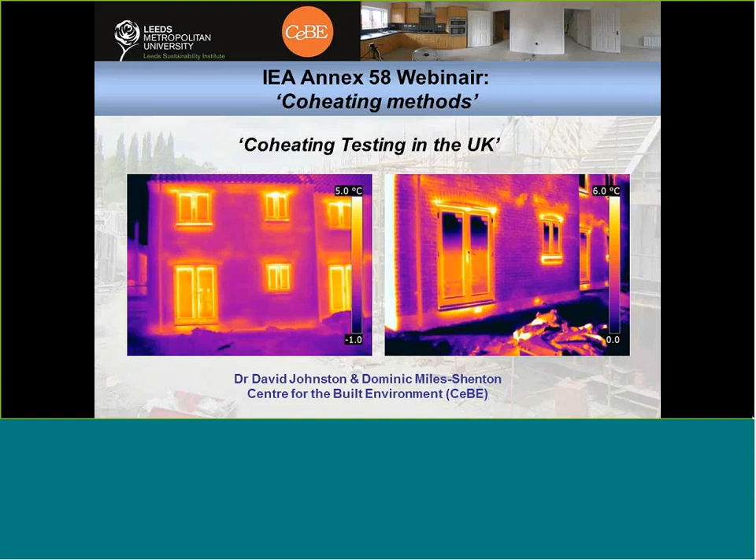Myself, I'm going to talk briefly about new dwellings and the co-heating testing that we've been involved with in new builds in the UK, and Dominic is going to follow me later on discussing existing properties and the ways in which we've used co-heating testing to look at interventions as well.

Just to give an overview of Leeds Met's experience of co-heating testing: we've undertaken in excess of 50 co-heating tests since our inception as a group in the UK. The very first one was undertaken almost 25 years ago in the 1990s as part of the York Energy Demonstration project, but the majority of the 50 or so tests have been undertaken within the last decade or so.

We've undertaken tests on a very wide range of dwellings, though only on dwellings. Most of our work concentrates on new builds—the majority of the tests have been on new build—although that's increasingly changing, and we're undertaking more tests now on existing dwellings as well.

We're testing a range of dwelling forms, from some of the most complex ones to test—apartments—through to detached dwellings, terraces, bungalows, semi-detached and detached, using very different construction techniques: masonry cavity, a traditional UK new-build method; solid brick wall construction for existing properties; through to more modern methods of construction. We've tested a hempcrete dwelling, for instance, and dwellings constructed using structurally insulated panel systems as well.

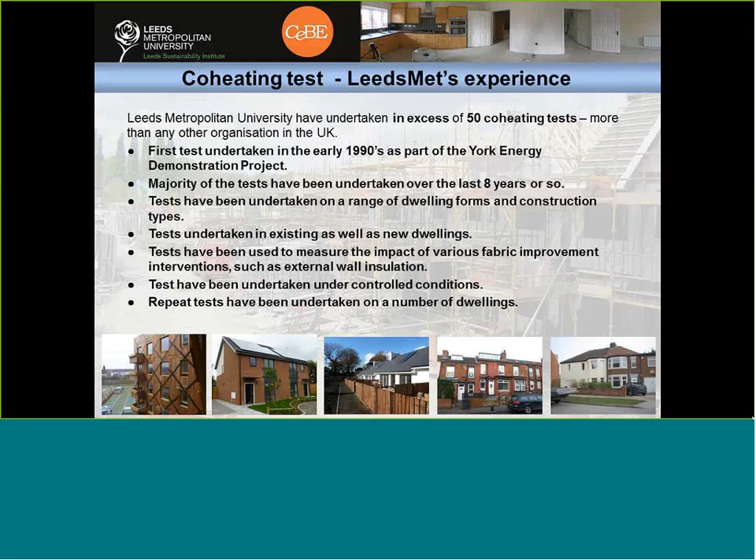We've also been fortunate enough to undertake tests under controlled conditions, which I'll talk about briefly later on, and we've undertaken repeat tests on a number of dwellings as well—one of the few institutions able to do that. So quite a broad range of tests that we've actually undertaken.

One important thing to know is that not all the tests have been successful. We've had difficulties with some tests—it's not always possible to undertake a successful co-heating test, no matter how hard you try. Because it's an in-field measurement, you are at the hands of the weather, and in some cases we've not been able to achieve successful results.

One example is a block of apartments in Middlesbrough, where we undertook the test in March 2012. During that period in the UK, weather conditions are normally sufficient to give a high, or reasonable, chance of a successful test. But unfortunately, when we undertook the test on this particular apartment, there were very high levels of solar insolation, and because it was a very small apartment with a large amount of glazing, that had a big impact on the test itself.

We extended the test period. One thing about co-heating testing in the field is it's not really a fit-and-forget test—certainly using the protocol we've developed at Leeds Met, you can't just undertake a test and leave it. We did carry out a number of interventions with this particular test, but out of 76 days of testing, we only got 11 days' worth of usable data, partly because of problems.

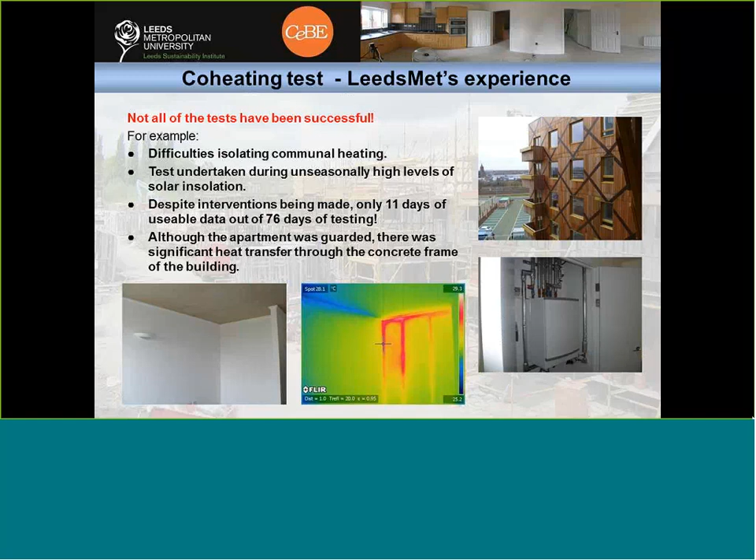In terms of the co-heating tests we've developed, we've used our expertise gained over the last 25 years or so to develop a co-heating testing protocol. The first iteration was published in 2010 by one of our ex-colleagues, Jez Wingfield, and that was adopted as part of the UK Government's Technology Strategy Board's Building Performance Evaluation Programme. We've since revised this and presented it to the IEA Annex 58 as part of building characterisation work. It contains considerable information on undertaking co-heating tests, ranging from the test procedure itself, the equipment required, where you may want to locate the equipment, the types of equipment required, and various issues to consider depending upon the type of building, thermal mass characteristics, and data analysis techniques. There's a web link in relation to the latest version of that co-heating testing protocol.

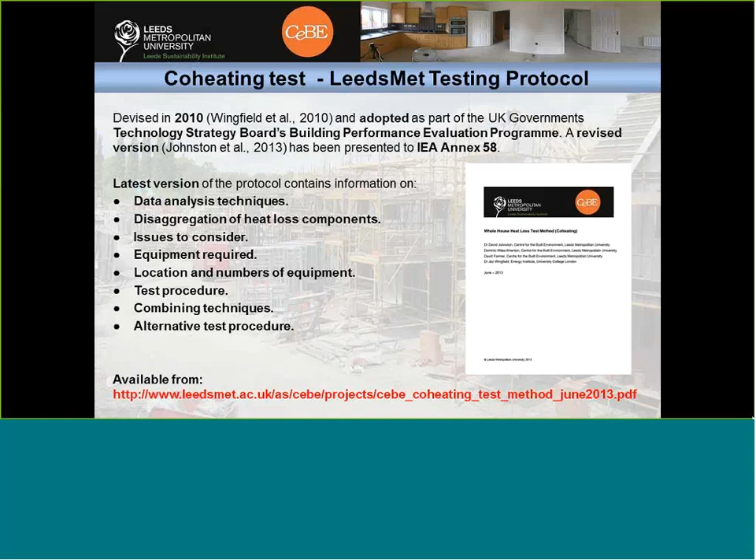In terms of recent results we've got in relation to co-heating testing, we've been involved with the UK Government's Technology Strategy Board Building Performance Evaluation Programme, and we were fortunate enough to test 7 new build dwellings as part of that programme, a range of different dwelling forms and different types of construction. The graph in front of you shows the results obtained from these tests.

You can see in blue the measured heat loss coefficient, in red the predicted heat loss coefficient, and in green the actual difference between the two. In all of the cases, as you would expect with dwellings in the field, the measured heat loss coefficient was greater than the predicted heat loss coefficient. I think I've got the colours wrong on that graph actually - greater than the predicted heat loss coefficient.

One thing to note is that in terms of predicted heat loss coefficient at Leeds Metropolitan University, it's important that when we compare measured against predicted, we don't compare the design intent heat loss coefficient against that which is actually measured, because quite often the design varies quite considerably. So our predicted heat loss coefficient is our best informed guess, taking into consideration what we've observed when the dwelling's actually built, of what the heat loss coefficient actually is.

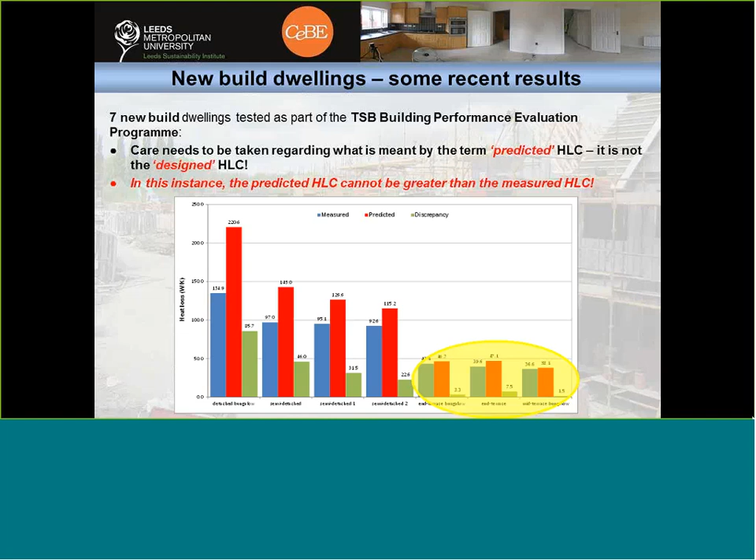If we look at the dwellings in our database of 26 new build dwellings, you can see there's quite a range of performance in terms of measured performance against predicted performance. In terms of the yellow ovals, that's the 7 dwellings included as part of the Technology Strategy Board's Building Performance Evaluation Programme. The sample, unfortunately, is not a random sample, because these dwellings have been presented to us as part of various different research projects, but this is the most comprehensive database available of dwellings measured through co-heating tests.

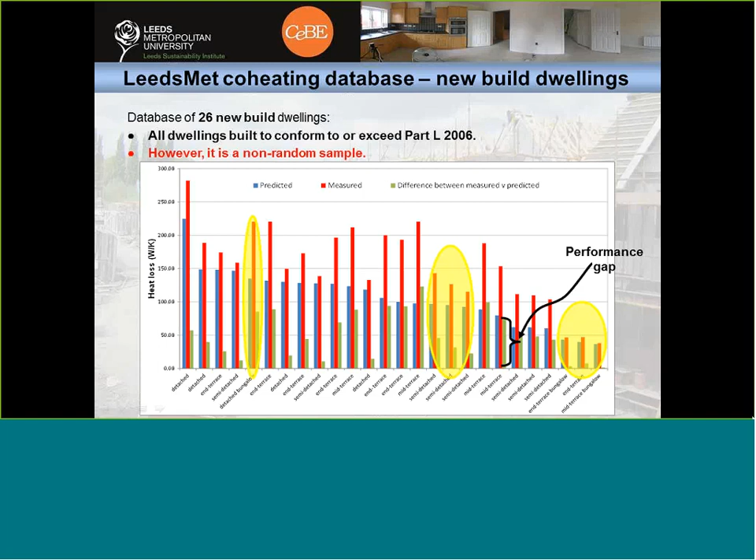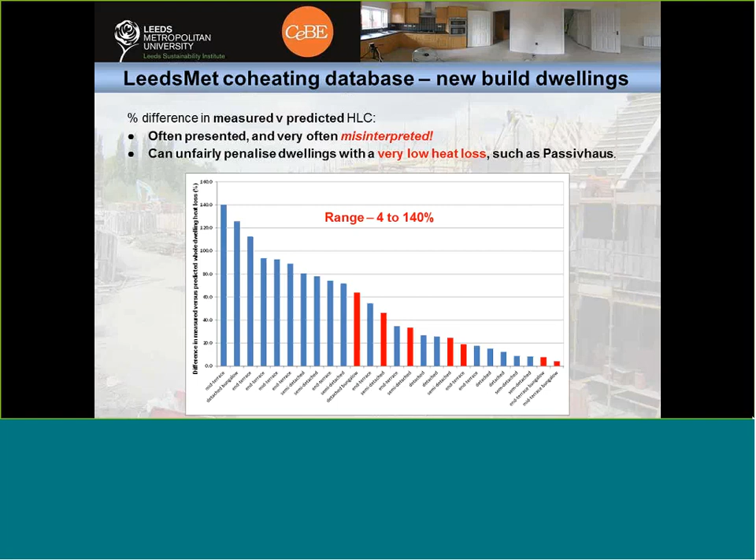If we look at the percentage difference between measured and predicted heat loss coefficient, this is a graph that's quite often presented, but unfortunately very often misinterpreted. You can see there's a very wide range, from about 4% discrepancy between measured versus predicted performance up to 140%. But one of the things this graph doesn't show is that it can unfairly penalise dwellings which have a very low heat loss coefficient, such as Passivhaus dwellings. Passivhaus dwellings can be very well insulated with very low heat loss coefficients, so small differences in heat loss coefficient can present themselves as quite a large percentage difference between measured and predicted performance.

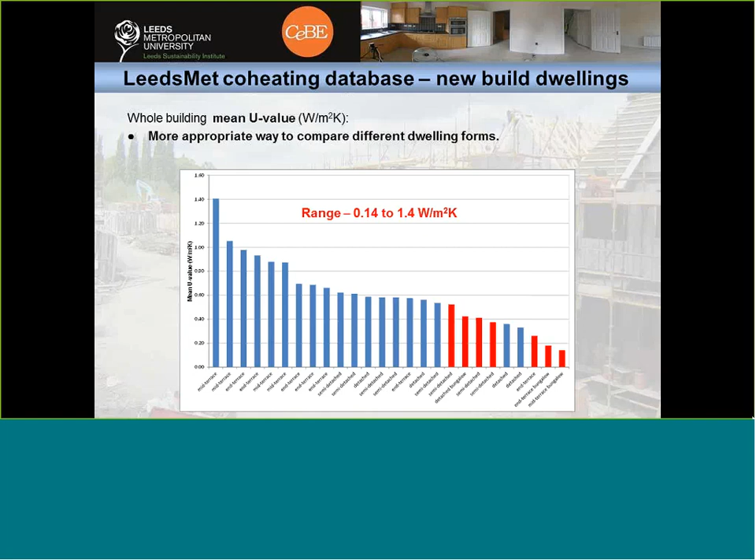A more appropriate way of presenting the information is to look at whole building mean U values - that's certainly more appropriate. Contractors have a much better understanding of an actual U value. There's again a very wide range in terms of U values, but the columns in red are those dwellings we tested as part of the Technology Strategy Board Building Performance Evaluation Programme, and they all perform towards the better end of the range of performance.

In terms of coheating testing, there's been some press in the UK recently regarding reliability and repeatability of the coheating test. We've been fortunate enough to undertake coheating tests within controlled conditions at the Salford Energy House at the University of Salford. That's a 1920s terraced dwelling, solid masonry, built within an environmental test chamber. For undertaking such tests, it's possible to remove conditions which can affect a coheating test and determine whether a test will be successful. For instance, weather conditions can be controlled and there's no solar insolation.

In terms of the work we've done within this controlled test environment, we've undertaken two separate tests at the Salford Energy House. One on what we term a virgin dwelling, the actual Salford Energy House as constructed within the test chamber without any intervention measures. We undertook that test under three different delta Ts, with a mean internal temperature of 25 degrees centigrade, with different external temperature conditions controlled by the environmental chamber, and the heat loss coefficient was very similar under each of the three conditions.

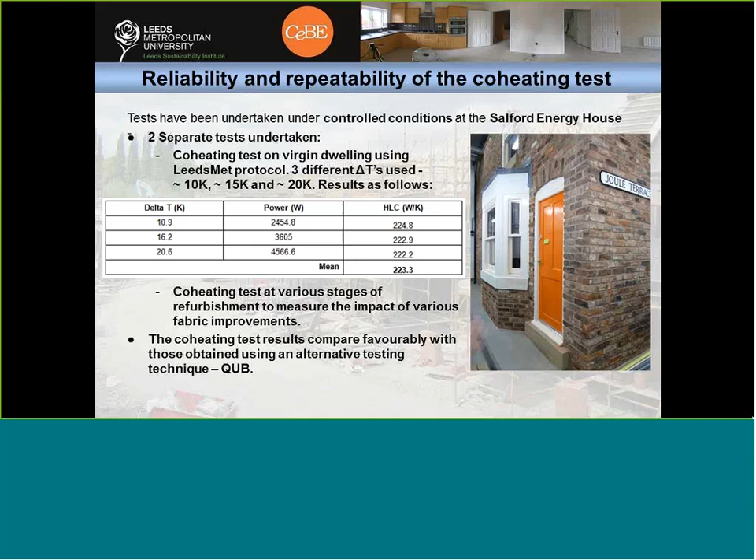Also, in terms of reliability and repeatability of coheating tests, we've undertaken some repeat tests on one particular dwelling almost 3 years apart, and they've shown in terms of repeatability that there's virtually no difference in heat loss coefficient. By undertaking an independent t-test on that, there's no significant difference between the heat loss coefficients either. So that gives us a great deal of confidence in the test protocol and the test itself, that it can be repeatable.

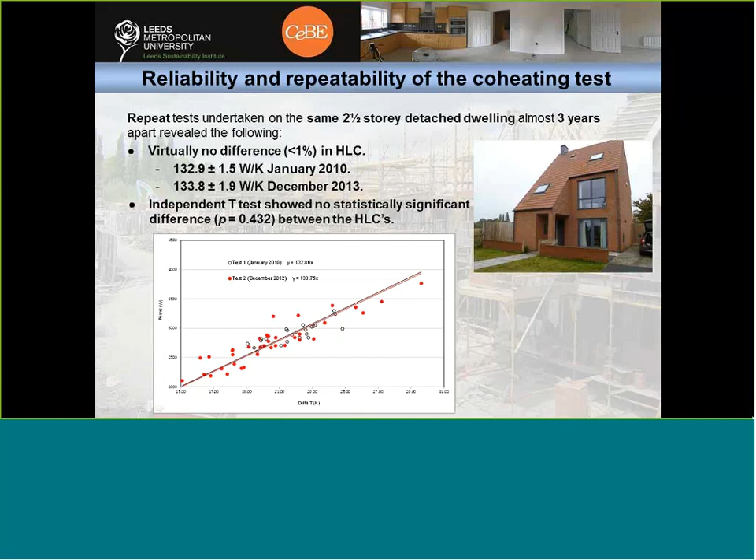One of my colleagues has also been involved in developing alternative test methods. The existing test protocol can be quite labour intensive to undertake and involves a number of items of equipment which have to be installed within the dwelling itself. One of my colleagues has developed what we're calling a simplified test method, where minimal equipment is required, just some temperature and humidity sensors, and instead of using electrical resistance heaters to input heat into the building, it uses the actual building's own heating system.

This is only at developmental stages at the moment, but we've undertaken some preliminary tests in the field on two separate dwellings of two different dwelling forms, one detached, one semi-detached, and they are of two different construction types, one masonry and one structurally insulated panel system, timber frame system. The preliminary results and analysis are encouraging.

Further work on this is planned later this month, where we intend to retest one of these dwellings, and we'll report on those results when they become available. We're hoping that the simplified method will mean there's essentially going to be a more commercially viable test out there, which will hopefully be much less expensive, much less labour intensive, and able to be undertaken within a shorter period of time.

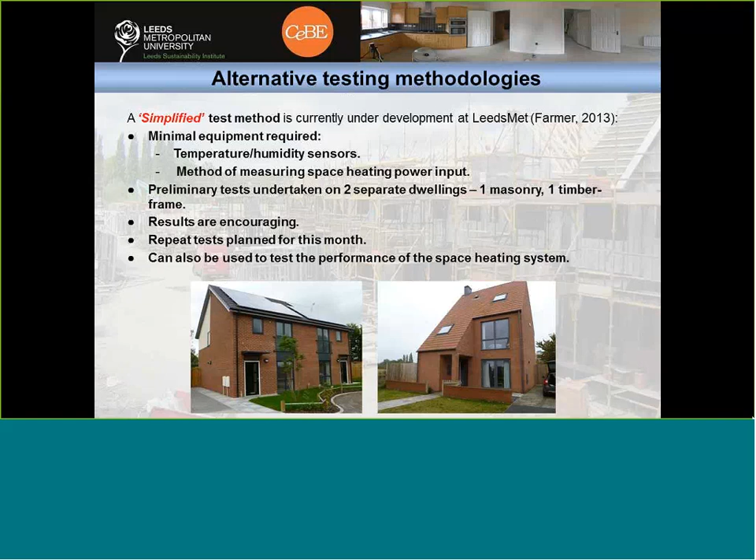I'd just like now to pass over to my colleague Dominic Miles-Shenton, who's going to go through some of the testing work we've undertaken on existing properties.

Hello everyone. I don't know whether it's the economic climate at the moment, but there seems to be less and less people wanting to measure just standard new build dwellings in the UK.

Most of the recent tests that David's been looking at have been of low energy dwellings. Most of the work now that's coming in seems to be looking, rather than just getting a general heat loss coefficient for the dwelling, at before and after work on renovations, just to see how successful they are and whether they're giving the energetic and financial paybacks that are expected from them.

So this, what you can see on the screen now, is a house that we're currently testing, or just dismantling the test. It's a quick video walking through to show you what we do on the coheating test. This is a back-to-back terrace house. It's got separating walls on 3 sides. We tested it in February last year in its original state, and now we're testing it again with internal wall insulation put on the front of the house, and the ground floor and roof insulated as upgrades. You can see the weather station on the front.

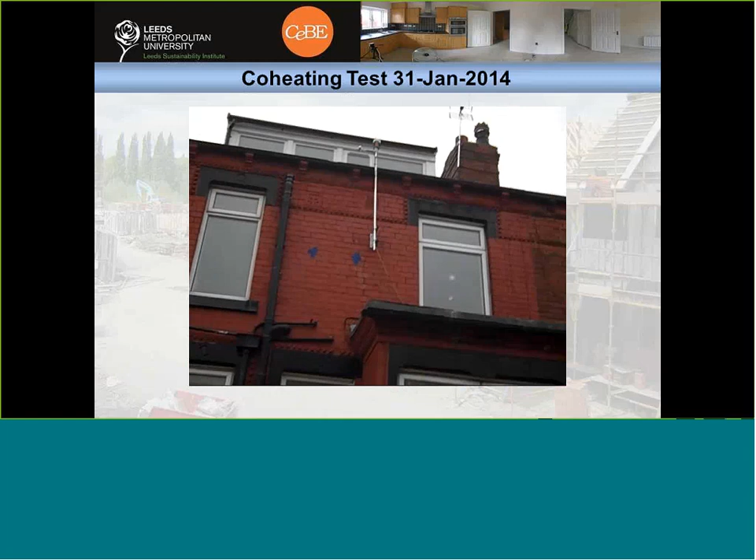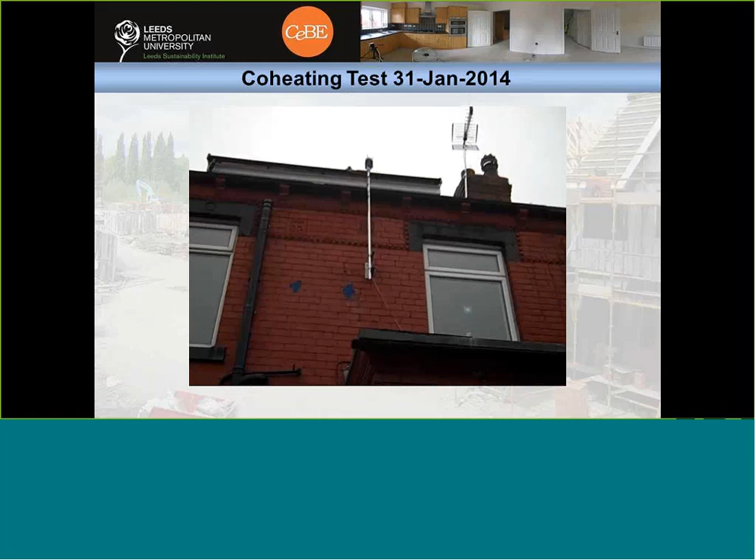Inside the house, because we've got 3 separating walls, we have to know how much heat is actually going into each of the neighbouring properties. So we have heat flux sensors on the adjoining elements, as well as on the external walls with the internal wall insulation fitted. There's one on the bay roof.

You can see that it's only a small house, so it's actually quite difficult to put all the stuff in there without it interfering with the measurements we're taking. But a quick one - heat flux sensors are recorded on data loggers.

We tend to put this setup once on each floor. Everything is plugged into the wall, it goes through a kilowatt-hour meter, so we know exactly how much energy is being put in there. There's a temperature controller, RTD temperature control, so we've got fairly good control. You can see the temperature set to 23 degrees, it was 22.8 in there. We tend to get very little variation from the actual temperature. The circulation fans keep the temperature stable throughout that room on that floor.

We have the same setup on every single floor, with heat flux sensors strategically placed. We use a thermal camera to identify the areas where we're going to stick those heat flux sensors - we don't just put them down there at random.

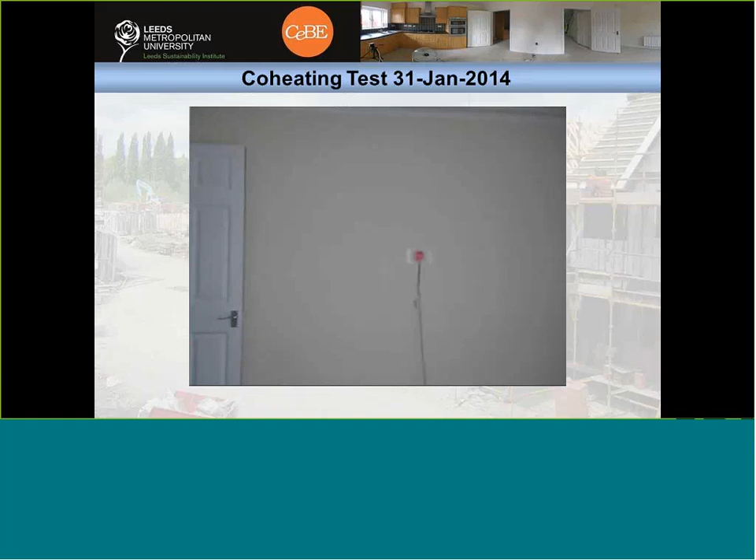This house had a cellar. A big problem with the cellar was - you'll see when the light goes on - the heat loss going into the cellar, which is also the main infiltration zone. So if you heat the cellar up too high, because the infiltrating air is coming from the cellar into the whole house, that will start to drastically raise the moisture levels within the house itself. So we put the same equipment in the cellar, so we've got an idea of how much heat is being lost from these cellars, from these basements. But we couldn't just keep that at the same temperature as the house because of this moisture issue.

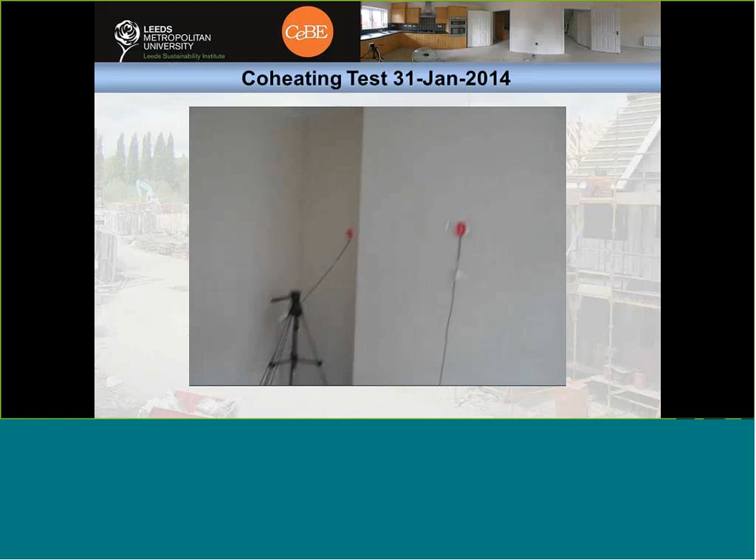So again, heat flux sensors on all the elements there, so we know where the heat's going from the cellar. Temperature sensors directly underneath where the heat flux sensors are in the kitchen above, so we know how the improvements in the ground floor are performing.

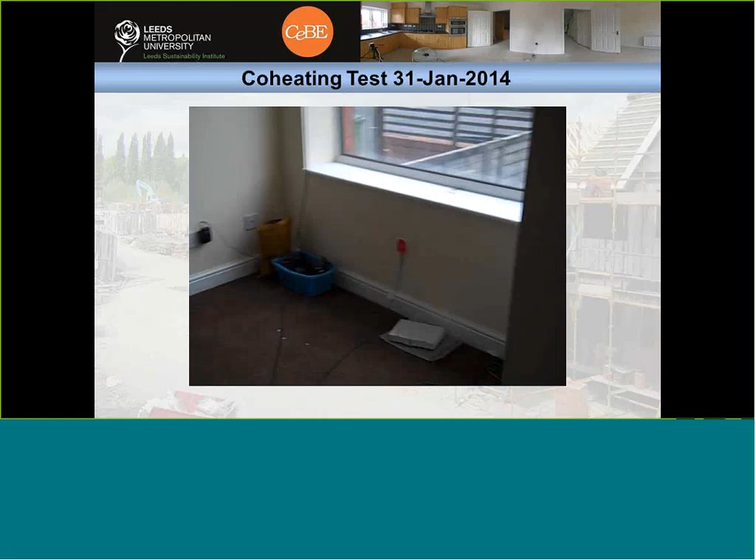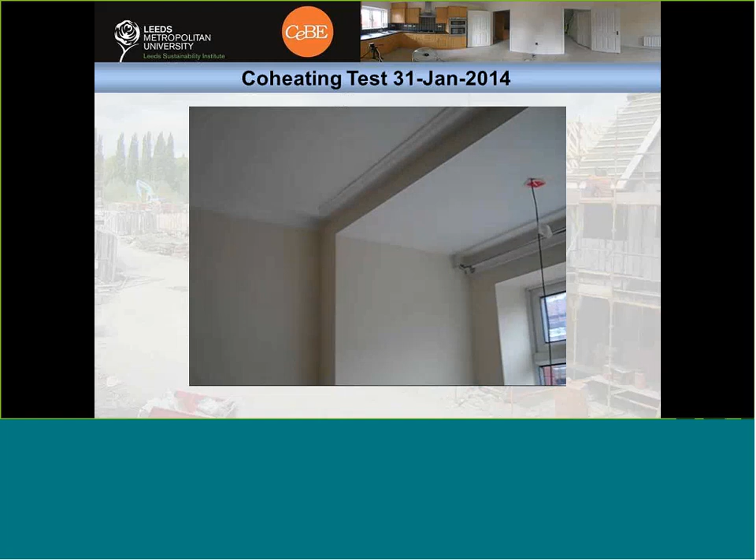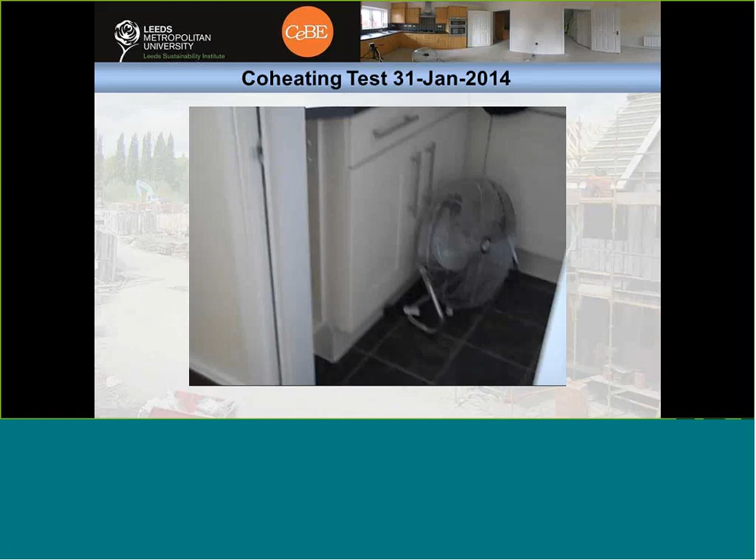Back up into the kitchen - again we've got PID controls for temperature and circulation fans keeping that stable. The circulation fans also stop any stratification of temperature within the rooms. We've got temperature, humidity, CO2 sensors situated all around the house, and again another heat flux sensor on the separating wall to that side.

This house had internal wall insulation fitted, so although we've only got a few heat flux sensors measuring the heat going through into the other walls, on the front wall where we've got this internal insulation fitted, we're looking at that in a bit more detail. You can see there is a much denser array of heat flux sensors set there, so we've got an idea of what's happening close to partition wall junctions and close to reveals.

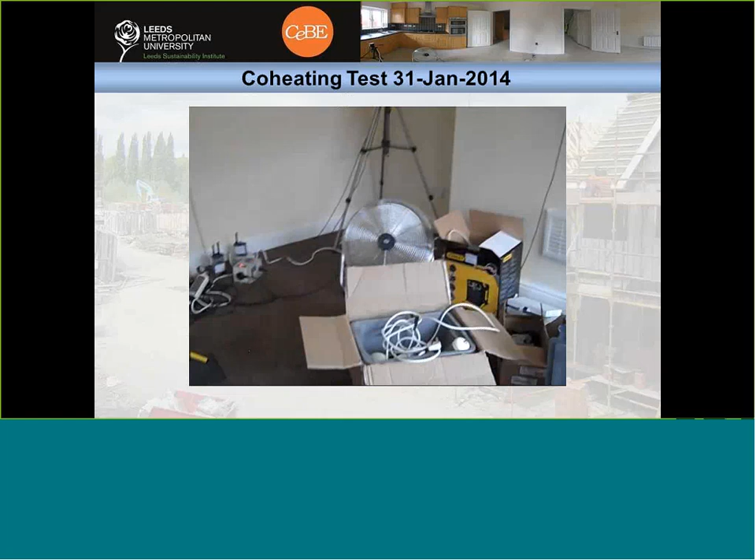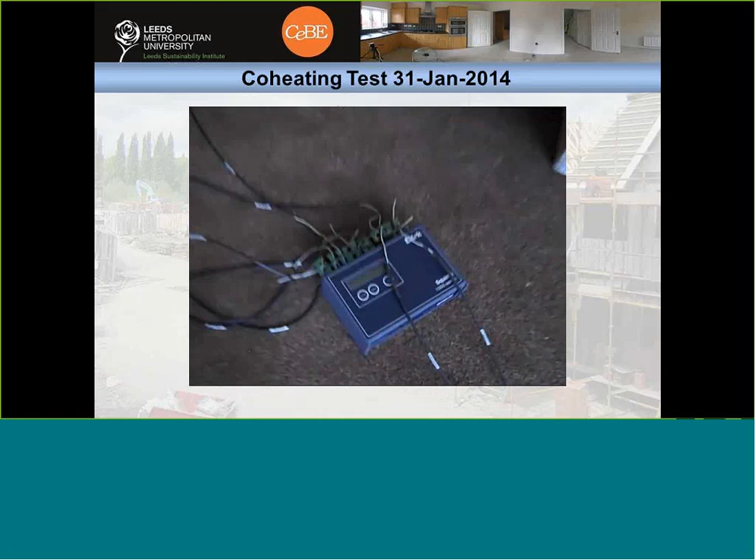We're also measuring the surface temperature - the probe goes through and touches the wall, so we know the temperature at the insulation external wall interface. Again, on the other side, we've got the same coheating test setup with the circulation fans and the same heat flux sensors there, and on the external wall we're looking at it in more detail.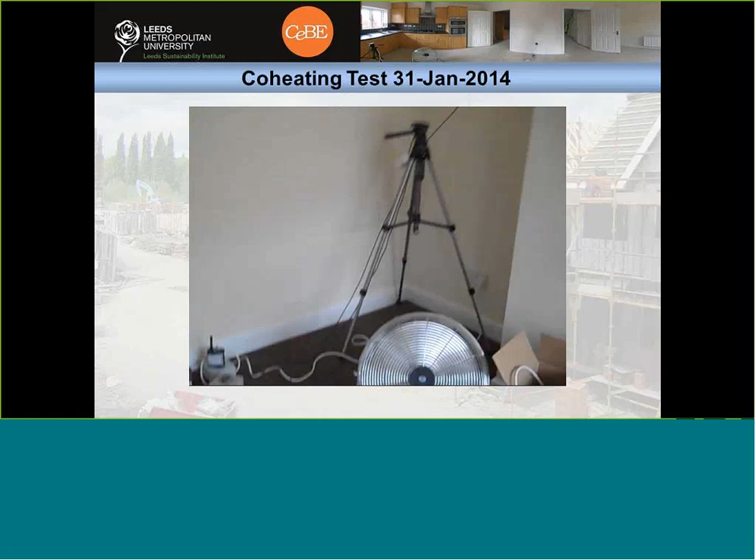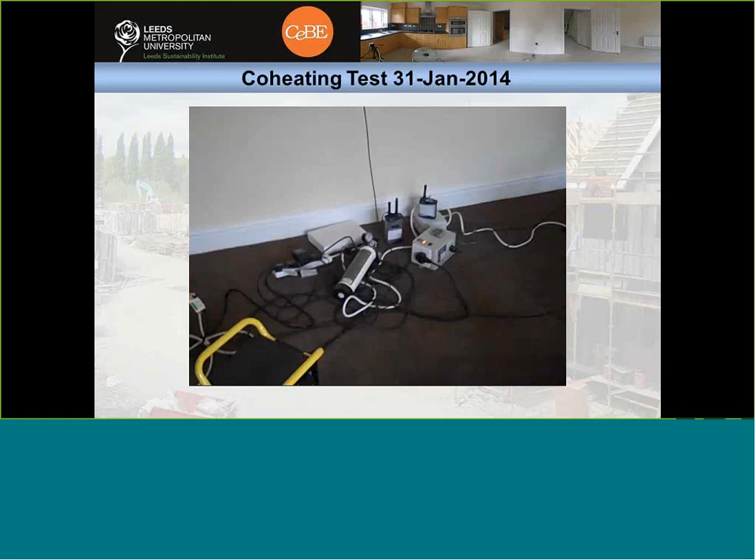Again, the weather station that was put on the front of the house, we're also logging. The data loggers - we can actually phone up using a modem connection from our office. So if there is anything that needs to be acted on quickly, if something's gone down or not performing properly, we can just go across there and see what's happening and sort it out as quickly as possible, because in a lot of these cases we only have a very limited time window as to when we can perform these tests.

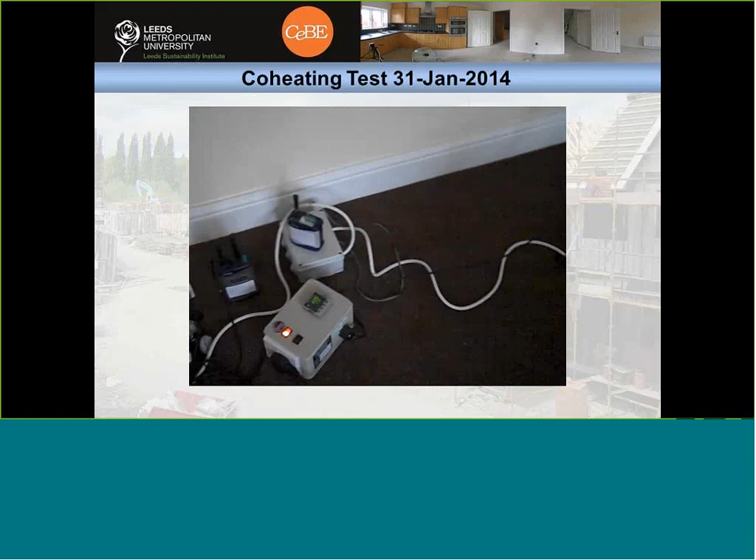Up onto the top floor, the final bedroom, again we've got these heat flux sensors on the separating walls. We've got an idea of how much heat loss is going through there, but you can see just how complicated some of these buildings can be.

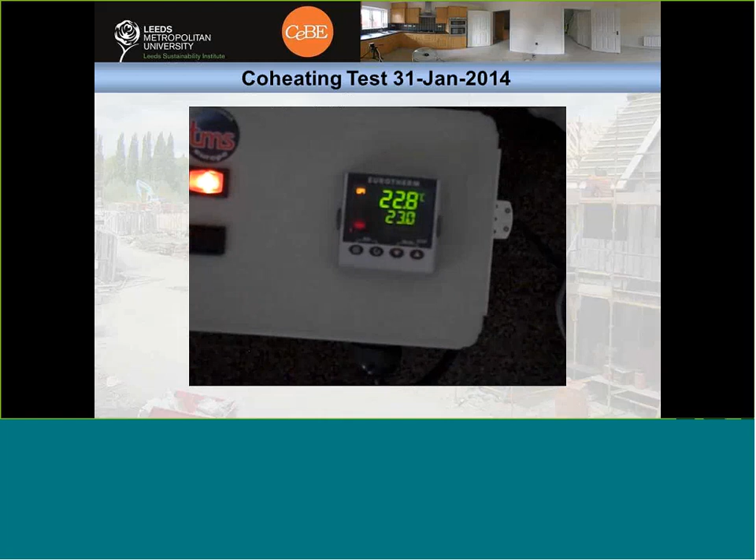If you just look at the roof structure in here, we've got a dormer roof, dormer cheeks, a sloping roof section, a knee wall going to a cold roof void at the front of the house. We've got these drop soffits with a steel beam going through, and we've got another area of flat roof, cold roof, which has just got loft insulation at ceiling level.

It might sound easy just measuring something before and after and seeing what the difference is, but it's trying to tie up where these differences occur. So basically that's that video.

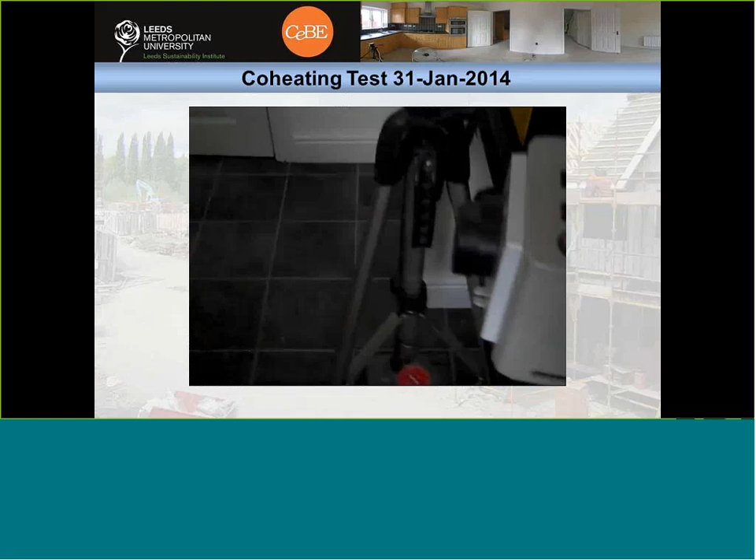So that's the house we're currently doing. There's a couple of other buildings that we've tested the interventions for.

The first stage was just doing the standard things they do in the UK, what we'd call a decent homes upgrade. So cavity wall insulation. This house had extensions, so they're actually internal cavity walls as well, that used to be external walls. They were also filled with blown fibre insulation.

It had loft insulation. The floor over the garage had to be repaired, and that was insulated. Some measures were taken to reduce air leakage as well. A suspended timber ground floor was boarded over and the chimney was capped.

So we tested it again then. And the second intervention, we were aiming at this aspirational government target of 80% reduction in CO2.

The floor was dug out and a solid floor with 200 mil of extruded polystyrene placed underneath, and additional air tightness measures were done there. So extra sealing on the service penetrations, and it was actually sealed around the built-in floor joists.

So that was an existing one. The houses you can see on the right are actually new build, not low energy houses, just ones that were built to UK 2006 building regulation standard. We tested some similar to this before and knew they performed particularly badly.